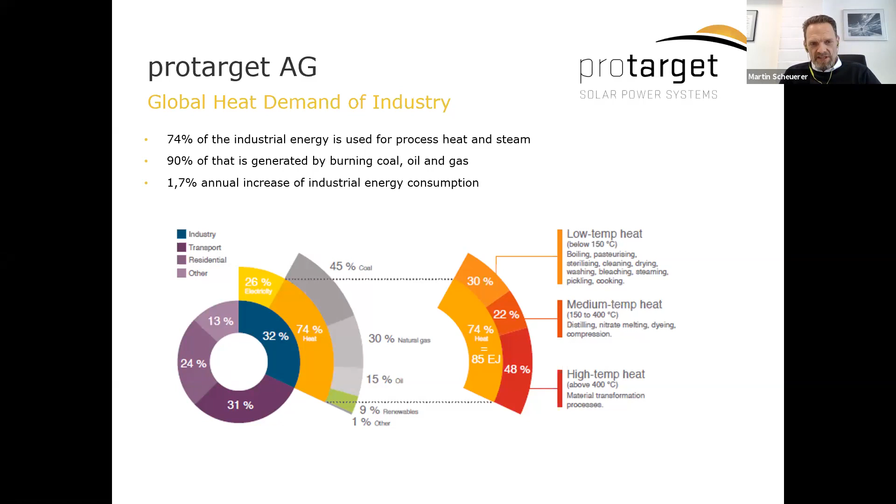This demand, this process heat demand, is continuously increasing, in particular in developing countries where more and more industries, for example, the food industry, are picking up.

What are the branches and the temperature ranges that are in demand of this thermal energy? Most thermal processes in the industry are in the range of 100 to 150 degrees. In order to provide those temperature levels, conventional fuel boilers are typically operated in the range of 150 to 200 degrees.

So this is our enemy. Yeah, the conventional fuel boiler that is burning dirty heavy fuel oils, mazout, diesel, gas, wood, you name it. This is the technology we want to substitute.

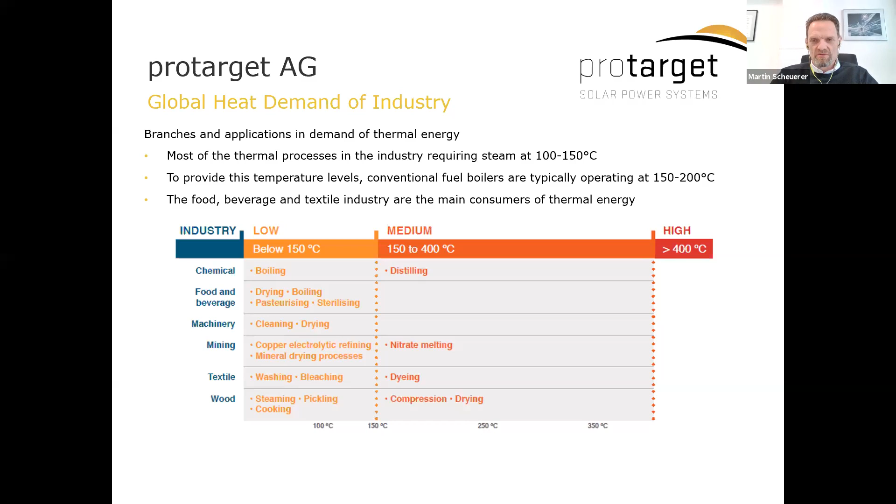How do we do this? We install rows of curved mirrors, parabolic mirrors. We use the sun's energy to heat up a heat transfer fluid to 400 degrees and more. With this heat transfer fluid, we basically go into conventional heat exchangers, steam boilers, and provide steam at any temperature and flavor the customer requires.

Obviously, since we are primarily generating thermal energy, we are able to store it and provide steam and heat also during the night or in periods of bad weather. Because even in the Atacama Desert, we will find days without sunshine. Rarely, but it happens.

Such a steam boiler system is typically integrated in parallel to the existing steam infrastructure of the customer. This means the solar system acts as a fuel saver rather than completely replacing the system.

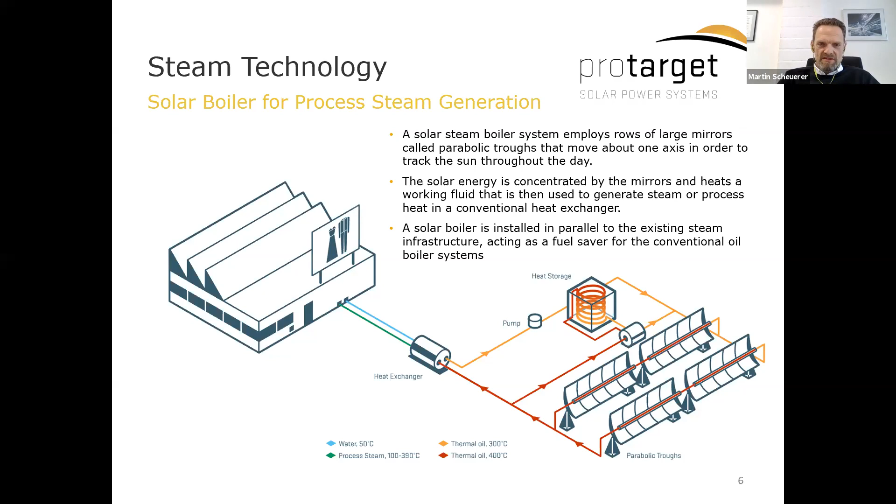So the focus now of my presentation is to show you some details about the economy of such a fuel saver system. And for this, we compare a conventional steam boiler with a solar boiler. So here you have a direct comparison.

On the left side, a good and fine German steam boiler that you might find in any place in the world, in the backyard of any factory. It is a very good piece of equipment. Yeah, don't get me wrong on that. It has low investment cost. It operates with oil and gas, which is a fuel that is widely available. It has a standardized size. And most important, it is proven and reliable. So nothing wrong about a conventional steam boiler.

The disadvantage, though, is it has high operating costs and it emits carbon dioxide. And this is the point where we want to angle it. We want to substitute the fuel, not the boiler. We want to substitute the fuel with a solar boiler.

So the solar boiler, on the other hand, is then integrated in parallel to this boiler, acting as a fuel saver. We provide steam directly into the infrastructure, which has as a result that the conventional fuel boiler reduces its fuel consumption significantly. Here we have an example of a 5-ton boiler, which is a quite typical size in the industry.

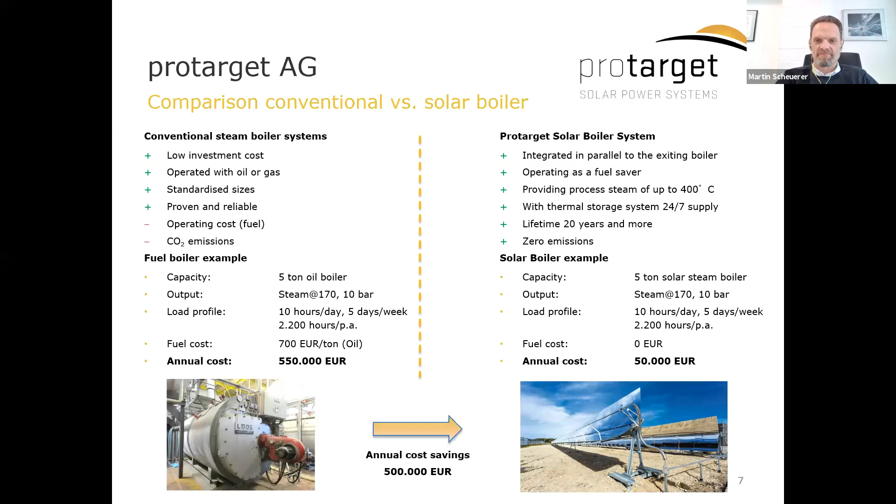To go a bit deeper into the economics of a solar thermal system, what would it mean for you, for example, as a customer? Let's stick to the 5-ton per hour boiler, the solar boiler. This would mean investment costs of about €2 million. Obviously, banks are involved in this. You're going to lend the money for an average loan of 5% per year. We have the 50,000 euro annual O&M cost when we assume the O&M cost increases 2% per year. The fuel cost with 700 euro a ton also increases at a rate of 2% per year.

And in summary, this results in a fuel saving for you of 550,000 euro per year. Not to be forgotten, the CO2 reduction, and this depends obviously on the fuel you are using, of almost 3,000 tons per year. And more important, the investment is paid back just on the fuel savings in 3 to 4 years, generating you a significant cost saving in the following years. So in this graph, as you can see, in year 10, you have generated net savings of 4 million euro.

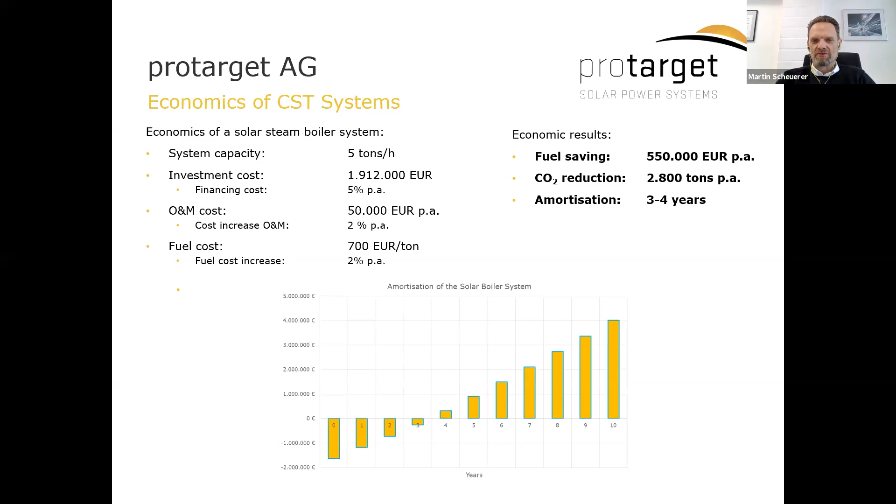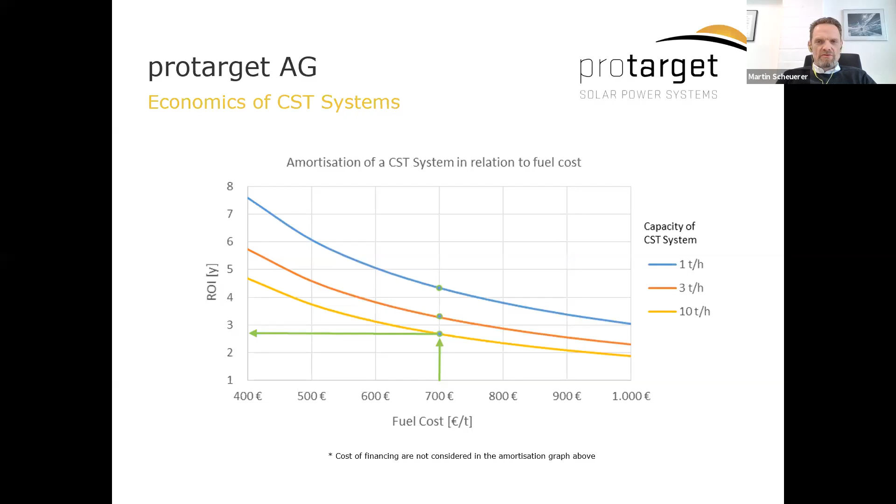So I'm already coming to the summary of my presentation. The message is, in industrial areas where steam is produced in a conventional boiler, may it be powered with diesel, HFO, mazout, you name it, at, for example, 700 euro a ton, we are looking at steam generation costs of 50 euro per ton. With our CST technology, you are able to generate steam at 10 euro a ton, which obviously is a reduction in steam cost of about 80%.

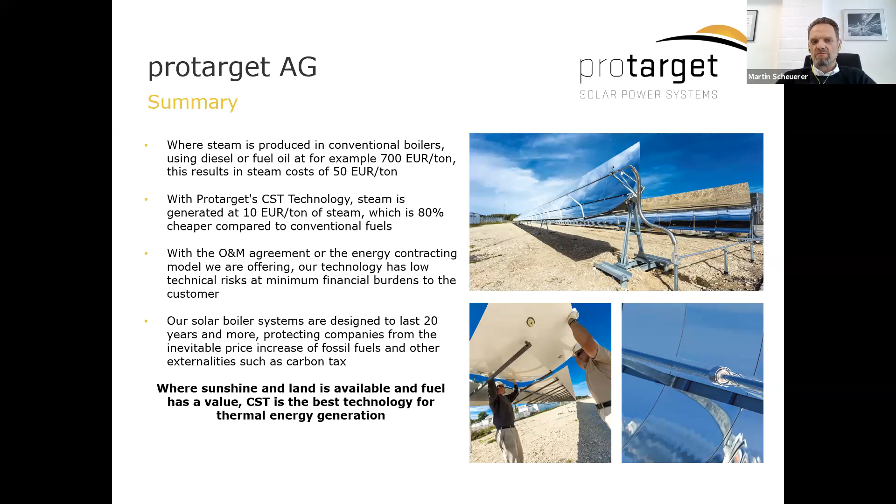As a company, we are also offering O&M agreements or an energy contracting model to take away any financial burdens from you or any technical risk you might see in this. This technology is not designed for Germany where it is produced. It's designed for the desert. It's designed for the Atacama. It's designed for harsh climatic environments. And it will last 20 years in this environment. So this protects you from any further fuel price increase or any other externalities such as carbon taxes and so on. So my message is, where sunshine and land are available and fuel has a value, the CST technology is the most suitable for thermal energy generation.

As I said, I am going to introduce to you our TVP Solar system. We are bringing this technology to the market after 10 years of research and development, and after we built a fully functioning production unit 2 years ago. So this is to be considered a new generation of solar thermal flat panels insulated by high vacuum inside the box.

So it's a rather new, I would say, breakthrough product that will enable the production of solar heat for industrial process and is designed for large-scale installation. So what you are seeing on the screen now is an actual solar field. You see it looks very much like a traditional flat panel, but its performance is in a completely different range. These solar collectors have a particularly high efficiency.

Guglielmo, just 1 second, please. Yes. Are you moving the presentation forward? Not yet. Not yet. No, not yet. Oh, okay, thank you. Don't worry about it. Perfect. I'll tell you when I do.

I'm just focusing on the fact that the product has been designed for industrial application and for temperature between 60 and 180 degrees. And the main difference with what, now I am moving the presentation.

Do you see the new slide? Yes. So yes, all perfect. I just thought you were moving them, we couldn't see them, but that's fine.

The main difference with what has been presented by Martin is that the flat collectors, I mean any flat collectors, ours included, can collect very efficiently both the direct light and the diffuse component of light. So we are not just able to produce such temperature in very dry climate with direct light, but also in foggy, dusty, and cloudy climates.

And I want to jump in immediately into the issue of the integration with the industrial process, because this is the kind of worry that most of industrial operators and adopters of our technology are showing. And so where do we put our heat? So what you are seeing is an extreme simplification of an industrial process heat circuit.

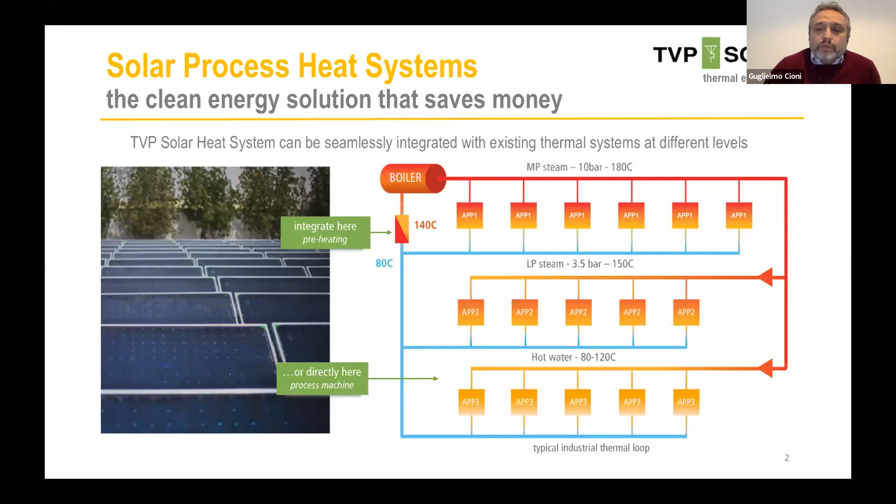We believe that this makes it as simple as possible to integrate a solar field into an existing process and to retrofit existing industrial sites. Because, to be clear, our solar field works in a closed circuit. So we provide the heat to the final application by means of a heat exchanger. So in any case, the user becomes independent of the solar field and can only use the upside of our energy production to reduce their fuel consumption.

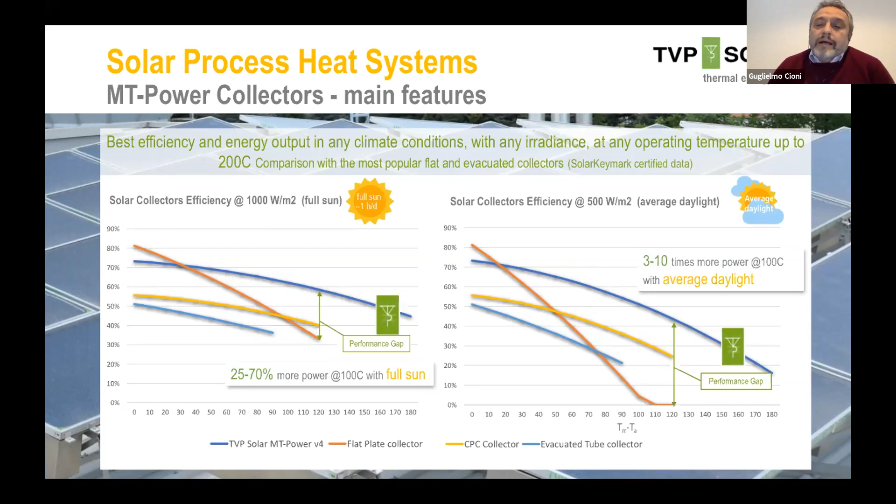In the end, what all of us care about is the energy production. And in this case, you can see that the high vacuum inside the panel makes a big difference. Already at 100 degrees, we are between 3 times or 10 times, depending on what collector we are comparing to, with the traditional products.

This is an example of one installation that we have already been operating for almost 1 year. This is in Abu Dhabi, so it's a high irradiance country. It's not a very large solar field, 150 kilowatt, but it works every day at 170 degrees for a rubber factory, making a real difference in terms of energy consumption.

And these are measured data. The solar average efficiency over the year is 37%. It works only during daytime. And what is most important is that this solar field basically does not need any cleaning. So we were talking about operational cost. The solar field has very low operational cost because basically it only needs some electricity to let the pump circulate the fluid, but it does not really need attention and cleaning.

Just to give you a clear number, the difference between the expected production of these collectors in this particular case and what has been actually measured is only 8%. And this 8% less production depends on the fact that there is dirt accumulated on the panels because the panels are never cleaned. But this is a trade-off that you can accept, if you like, in return for the simplicity of this system.

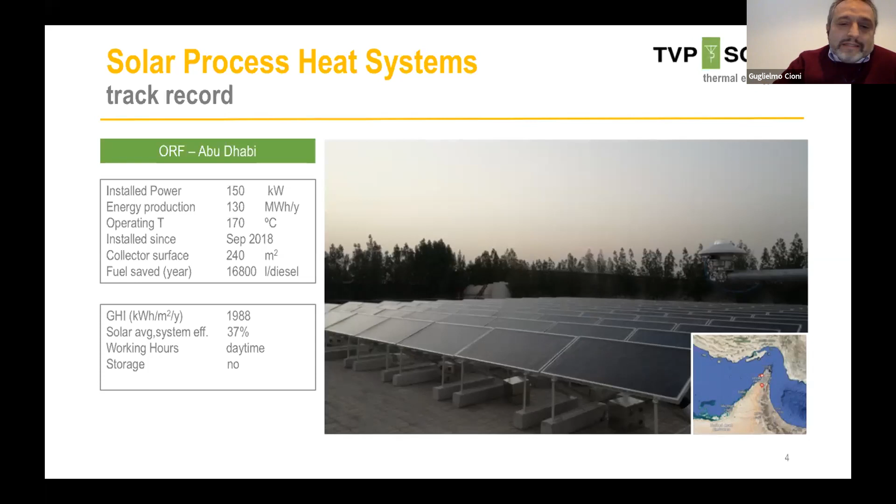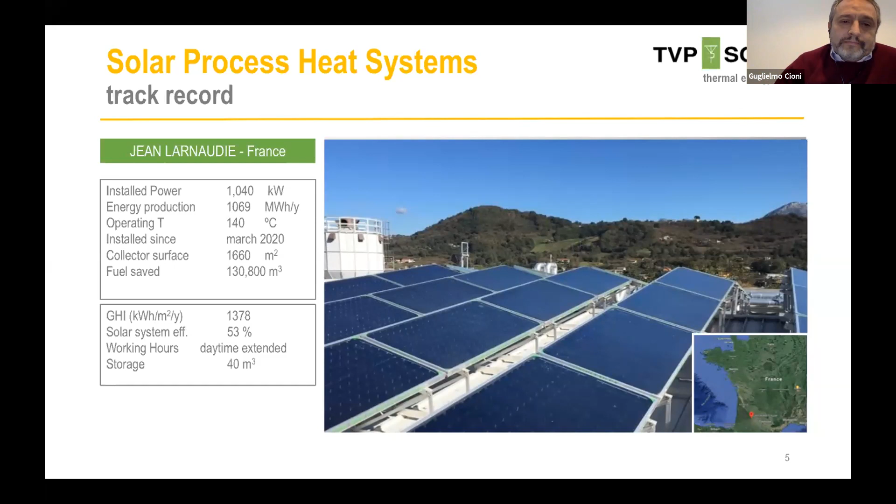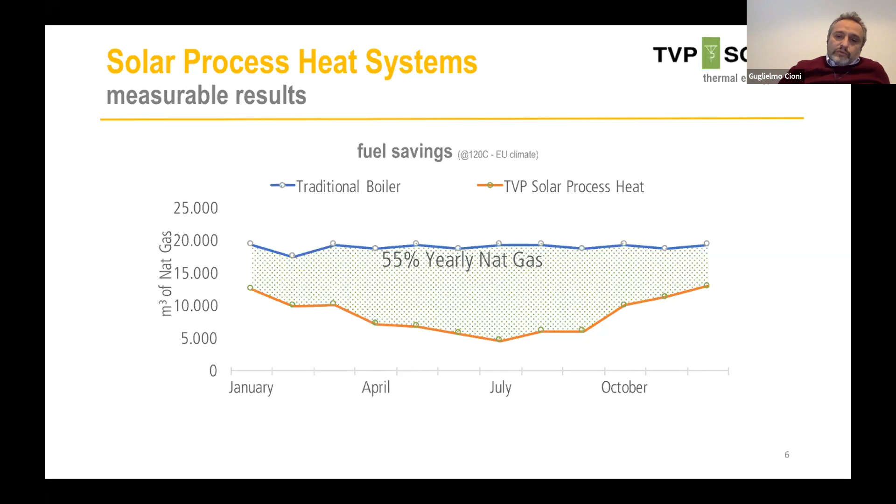So there are measurable results of this technology, and we measure it in terms of savings. And these savings are substantial over the year. This is a case we have elaborated, for example, not in a very hot climate, but in a European climate, basically in Italy. This is something that you can achieve by complementing a typical hot water boiler or a steam boiler with solar. I don't want to go into more detail of graphs because I hate them. But you would be curious to know about the OPEX and CAPEX of such a solar field. So I'm putting them right there.

A typical setup that we would suggest is to go around 3,000 square meters of panel that would produce between 1,800 and 2,000 kilowatt, depending on the climate we are in. The CAPEX for such a system would be around 1.5 million, and the OPEX is about 3.1 euros per square meter per year, so about 9,000 euros in this case. The cost of energy resulting from such a setup, without considering any subsidies or government support, would be between 25 and 40 euros per megawatt hour. That I believe is below today's cheapest source of energy, that is natural gas.

The economic assumptions behind these numbers are that the solar plant lifetime is 25 years, without including any facilitated financing. Of course, you might ask, how do you know that the plant will last 25 years? We have submitted our product to accelerated stress tests, both for corrosion and for thermal cycling, and so now we are confident that the duration of the product is 25 years. And by the way, we provide guarantees for the panels for 20 years.

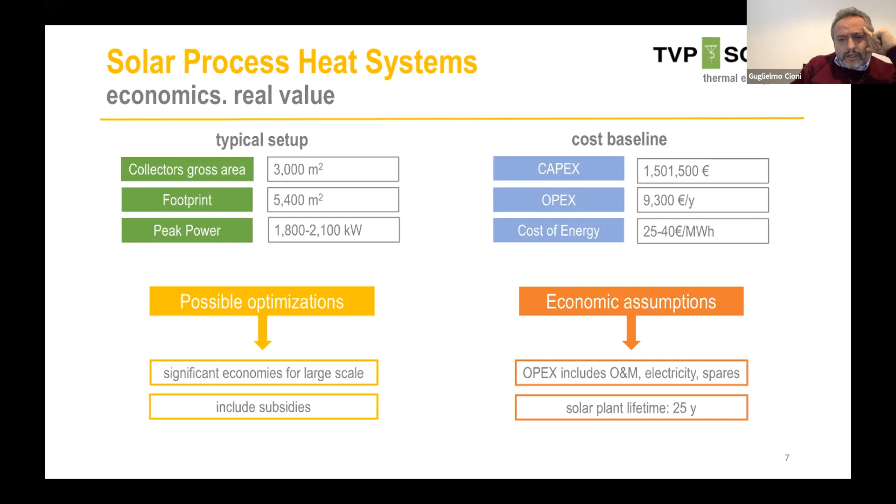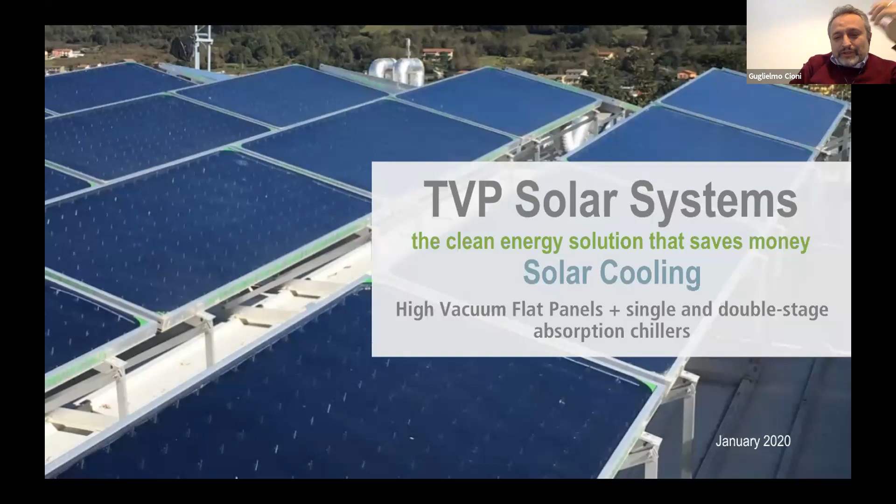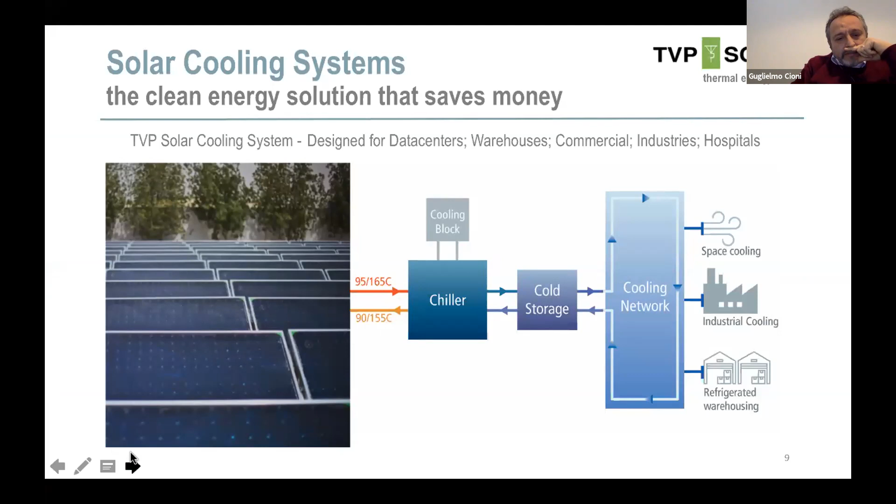So just to go on quickly, I want to show you that we also have the cooling application, because the topic should also be commercial application. We have already established some applications using absorption chillers fed by our solar field at 95 degrees or 165 degrees, depending on what kind of chiller we are using. This is a practical application we have already established, for example, in Kuwait, and it can provide substantial savings in terms of electricity, for example, for large non-residential buildings.

But anyway, it's in competition with the very efficient electrical cooling systems. Therefore, we believe it is most suitable for very hot countries, which will use the cooling service for the whole year. The alternative to this would be to have a dual use for the solar field. For example, in the case of European climate, we are proposing the solar field in a dual configuration that can provide hot water, therefore space heating during the winter, and space cooling during the summer.

I'm not sure if I stayed in the time.